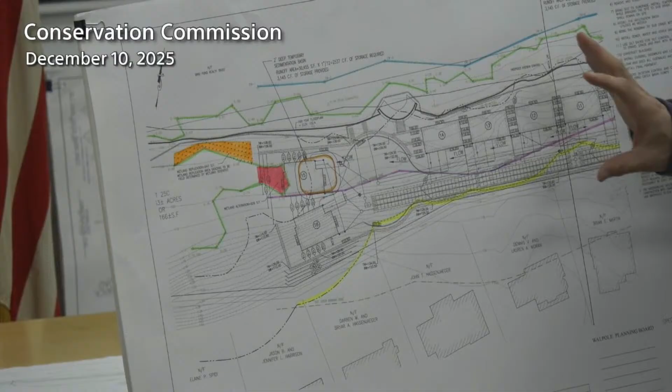This pink area was intended as filling of BBW, and the orange is the replication area. But after talking with this, we think we can shift some of these buildings around and end up with a different configuration at the end of the cul-de-sac, and then not affect any BBW filling.

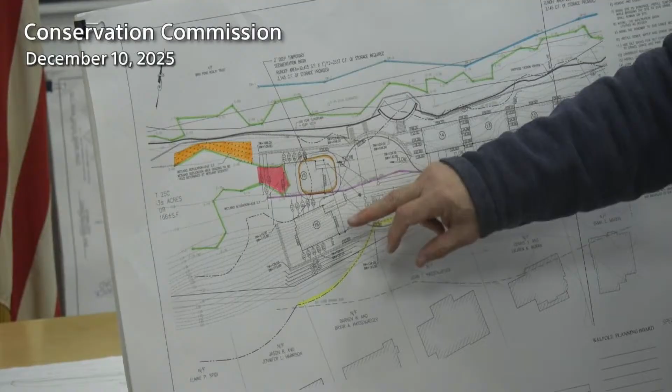So the only building that would change is building number 15. Well, the configuration or the orientation of that, one of those buildings would have to go. We don't know which one. My point is, if you're making other changes, we need to know what they are in order to address your request for a waiver. Well, absolutely, I agree.

Yeah, unfortunately there's a lot going on, holidays and things, people go on vacation, so we don't get it. But from the standpoint of the technical review meeting, we are taking those comments in, and we're trying to revise the plan to address the comments that have been raised.

Okay, so in that particular case, we would be doing something in that area to address that particular item, which is the BBW filling.

And then this dark line that you see across is the 100-year flood elevation. Now, I know you think that the level of Bird Pond is a temporary thing, but it really isn't, and I think you'll be hearing more from the dam people shortly.

Okay, that issue is settled right now until dam safety decides otherwise. It isn't affected by that anyway, it really doesn't affect what we're doing. We're not going in the pond, and we're not even close to being in the pond, so it's just the level that we flagged out, because it's the level of the resource area that was previously flagged by the preceding engineer.

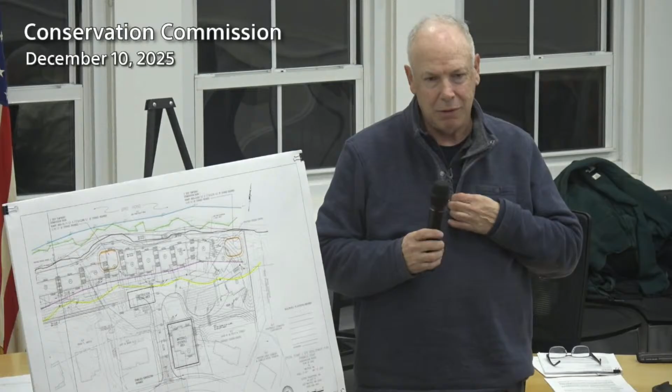Okay, all I'm saying is we're not disagreeing with you. We're saying that we're not interfering with the pond level, even if it were at its previous location.

Back to the 25-foot no-disturb line. Where is that, if you're gonna be moving buildings? The 25-foot disturb policy extends from the BVW, not from the pond elevation. I'm aware of that.

You said you're gonna make changes to the layout. Yeah, okay, you'll see that in the next revision, Pierre. Obviously, I don't think we can make a decision on your request for a waiver for the

25-foot no disturb until we see what your revisions are. Understood. I think the purpose of this meeting, because it's been a while since we had the peer review proposal, the peer review submittal, we haven't met since that time because there was only one meeting in November, only one meeting in December, so we're trying to catch the commission up to speed on what's transpired since.

Okay, so you're gonna be providing us with a revised plan, a revised set of plans for the next meeting. Prior to the, 2 weeks. And so that it can get reviewed, we need them well ahead of time, and also to get time for us to review and for Beals and Thomas to review. Understood, we're working on it.

Can I interject something? So, the original boundary of the pond is the P-series, which you've taken off the plan. Right, I understand, and you're asking us to put it back on. Yeah, okay, yeah, because that's where the riverfront area should be measured from.

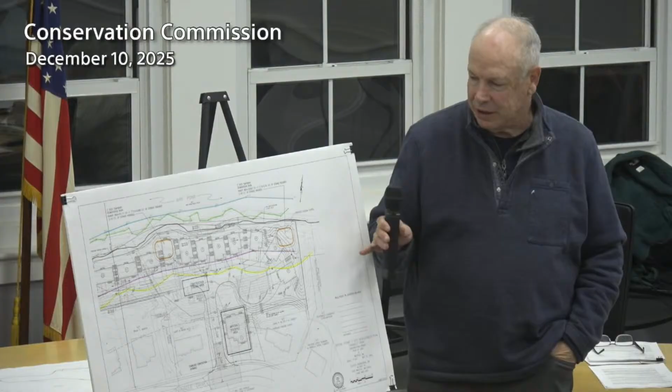Depending on if you have your BVW below the level of the pond, so the BVW is underwater. I don't think the BVW is below the pond level, even as it is today. The BVW is pretty close to whatever the line was before. It might vary a little bit, but it's not gonna affect where the elevation of the pond is versus the BVW line.

Yeah, I think that you need to put the P-series back on, because based on the... This is the first time we're hearing about it, though. Based on the ORAD and the SORAD, and then the final decision, they upheld that P-series is the boundary of the pond. The pond is the boundary of the river, so that needs to be put back on the plan.

Fine, we'll put that on there. In fact, we had it on the plan, and you asked us to take it off, so now we're putting it back on. He asked you to take it off. I think you replaced it with something else. I don't think anyone asked you to take it off.

Didn't John Glosser present those plans, give you those plans recently, the other day? With the— We have not, no, I haven't received anything new, no. He sent, I got a copy of the email that he sent you, you asked him for plans showing you— You didn't get those? No, I did not. Oh, I'm sorry, that's the problem with email.

That's why we really prefer final submitted plans should come in hard copy, because sometimes people submit plans and they're too large. If they're too large, yeah, nobody gets them, and nobody knows.

I'll drop those off, because I got a copy of it. It should be on your set. Agreed, but this set was submitted, and then you asked for those plans, and I was under the impression that he had submitted to you, because I got a copy of them. Okay, great, we're all on the same page right now, it seems like.

So let's move forward. So those are the things that we're gonna be doing. But obviously, I think there's other things happening with the Department of Recreation or whatever, that's gonna, by the time this transpires, I would think there's gonna be other things happening relative to the pond.

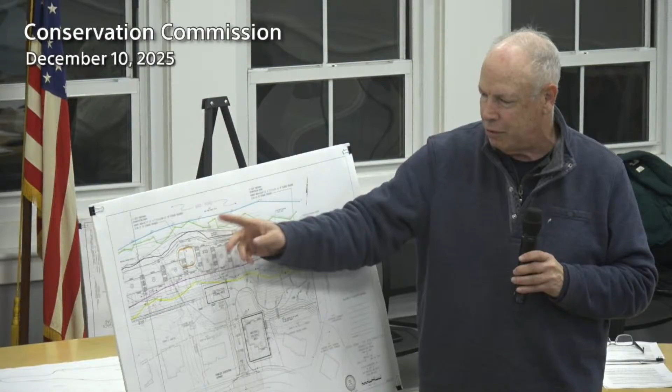The waiver takes us all the way from the beginning here, which is in the river—all of this area in here is all degraded, there's foundations and other things in here. So there's areas of this plan and this property that are significantly degraded, and it doesn't take a rocket scientist to see whether or not a waiver would be in order, because it's not in its natural state.

We'll address that. Okay, when you give us that, what else do we want to go over? Do you have anything else you want to present?

I would just suggest that if you want to revisit the 25-foot no-alteration area, that they mark out the specific areas at the site that they consider to be where they want a waiver. Right, well, we're looking at the whole site, 25 feet all the way straight down, everything.

Well, you're not proposing to alter the whole 25. No, but I think that the whole 25-foot area needs treatment, it's full of invasives. Well, a waiver means that there's no 25-foot no-alteration area. No, well, there's a big difference there.

Yeah, I agree. I'm thinking it would be something similar to what we did down on Burns Avenue, a restoration-type proposal within that 25-foot area, making it significantly better than what it is today. Then I suggest the commission, before giving any waiver to any of the 25-foot no-alteration area, that the applicant submit exactly the restoration that he's going to do.

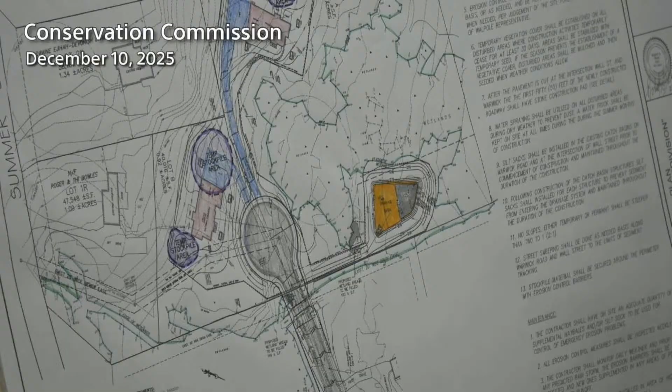It wasn't clearly understood at the time that the work was going to be allowed by the homeowner, but we have since reached an agreement. The agreement? Right here, but I'm not going to submit it - I can let you read it.

Well, we shouldn't be holding this public hearing unless you have an agreement from the property owner. There's an agreement here that says we have it. I don't think the chairman can - it's just not appropriate for it to be public record, that's all.

Is it signed? Yeah, of course it's signed. Doesn't it have to be public record if we're having a public hearing? Well, he could have given me a letter of authorization without disclosing the agreement, but we have the agreement. That's what we need.

This is an agreement, for the record, between Wall Street Development and Stephen Kelly and Gene Kelly. We need this for the file, so okay, then keep it - we need something on record that says this agreement exists.

Okay, sure, keep this. So for the record, there is an agreement signed by Gene Kelly and Stephen Kelly and Lou Petrosi from Wall Street Development, dated December 10th, 2025.

And I don't have to read the whole thing, but we'll just check and make sure it does what it says - that you're allowed to do what's needed. Essentially, if you look at the exhibit to that agreement, it has a shaded area showing where this grading line is, right here on his property.

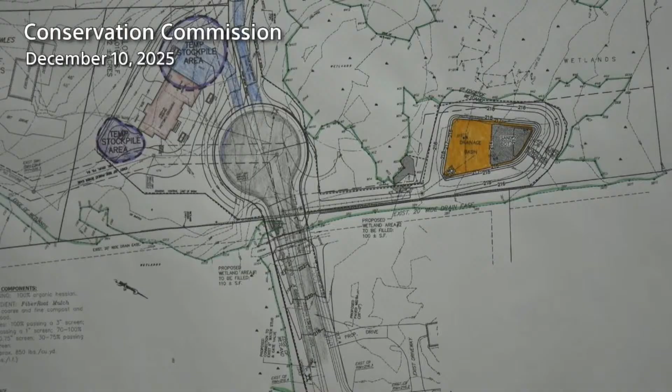So if you see the grade lines in this location right here - typically when you do grading, if you're covering up roots and things like that, the trees are going to die anyways. But at the time we were going through the subdivision process with the commission, we didn't have authorization to get that part included in the order of conditions. So now we're coming in for a modification with that agreement.

We've reached an agreement to do some tree removal and grading on his property, as you see in the attached Exhibit 1 to that agreement. By the way, there's not expected to be any excavation - we're just cutting the trees down to their roots, or down to the stump, even with the ground, and whatever grading happens will just be on top of the stumps and then seeded.

Okay, alright. Landis? So with any amendment to a plan, we need the plan that is amended and the work that is to be amended, so it's a little hard to tell with a marked up, reduced size plan.

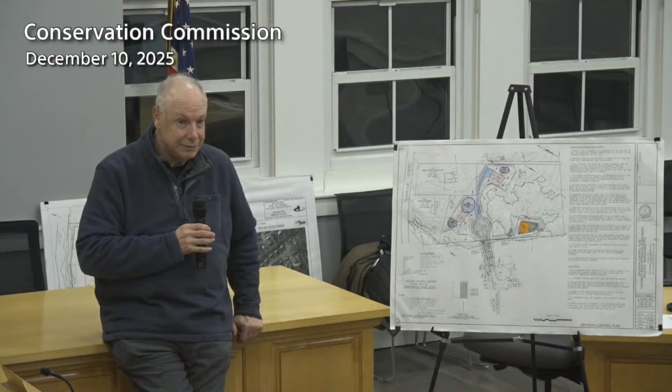We can approve this pending the revised plan? I'm okay with that. Does anybody have any questions? Jessica? Bailey? No. Al? No, that's it. Any questions or comments from the audience, please identify yourself for the record. Hearing none, we'll close the hearing. So moved, second, all in favor? Aye. We need a revised drawing, we'll hold off paperwork until we get it, okay?

I'll try and get that to you this week, by Monday, 2 copies please, full-size. Sarah, did you get that email?

Okay. Terrible. We just have one more. This is...

The other one. Well, it's all in here, I think, all the same.

Public hearing notice, Town of Walpole, Commonwealth of Massachusetts Conservation Commission, request to amend the order of conditions. In accordance with Massachusetts General Laws Chapter 131, Section 40, the Wetlands Protection Act, and the Walpole Wetlands Protection Bylaw, notice is hereby given that the intent of Wall Street Development requests to amend the order of conditions, DEP number 315-1324, proposed redelineation of wetland flags located at Lot A, Warwick Road Extension, Map 56, Lot 89 and 90. Application plans may be viewed at the Conservation Commission Office, Room 212, 135 School Street, or www.walpole-ma.gov/Conservation Commission. The public hearing in the above matter will be held in person at the Walpole Town Hall, FinCom Room, 135 School Street, December 10th, 2025, 7:09 PM. All persons are requested to be present.

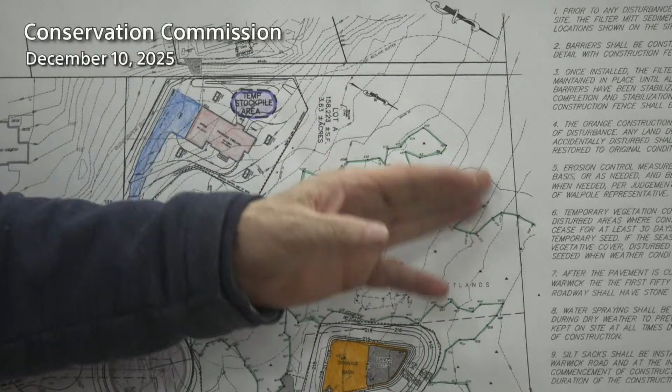So essentially, I don't know if you folks recall that when we did the ANRAD on this lot, this wetland line, there was a little bit of a disagreement, and we only got an ORAD for the delineation up to a certain point. I've asked Goddard Consulting to go back out there and revisit the line and go out there with Landis to get to an agreement of what the line is from, I guess, from this point back.

And basically come back and amend the line if there is a line change. This was the original line on the plan, but the commission only approved somewhere up here, right? I forget the flag number, but it was K1. Yeah, somewhere in here. So essentially, I'm asking to come back in and review this portion of the line going out, just so that there's no disagreement later on. And that's really kind of the request for an amendment.

I don't think we can resolve it today, because obviously Goddard and Landis have to go back out and agree on the final line. We need more information first, so she should do some transects of the area, additional data points. I'm just waiting for comments.

Oh, I thought I sent an email. You didn't get that email? I don't think so. A lot of sent emails to you. Going missing these days. Two emails, one I usually get your emails. One on the extension and one on this, saying I want additional data sheets. Is that the one sent last night? No, or the other night? No. Anyways, okay.

Yeah, additional data sheets, rather than spending two hours out there with her poking around, because it's a very complicated site, and I don't think this is the right time of year either. Because it's not right now, and it was three months ago when we started all this.

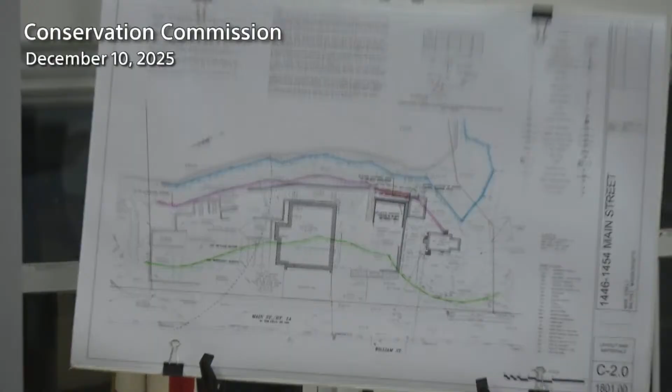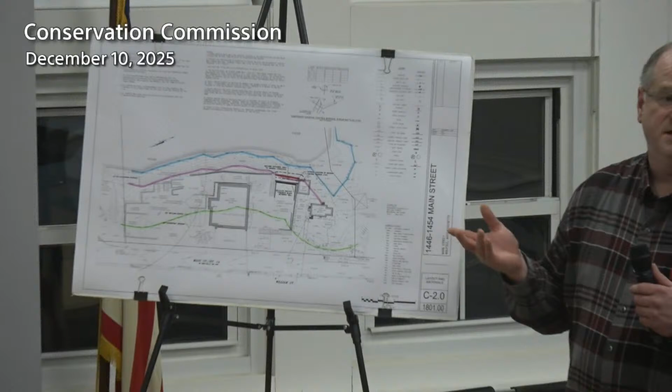I'm here with the applicant, Frank McNamara. This is his garage facility. Earlier in the year, he put up temporary concrete block walls and created storage bins for various landscape material, some of it from the town millings, mulch, and composting. Those were all established and put on top of his existing paved areas that was already present on the site. And after it was all in, at some point, somebody noticed he had done all this work. Somebody stopped by and said, you need to file a notice of intent. So here we are. We did an updated survey, flagged the wetlands, went through the site and looked at everything.

There's one area where he was within the 25-foot no alteration zone, shown right here in red. So the proposed work is to move that wall out of the no alteration zone, but keep the storage bins basically as is, other than sliding that one forward about 5 feet to get outside of the no alteration zone, which allows them to also get behind it to clean it up a little bit. That's the site in a nutshell.

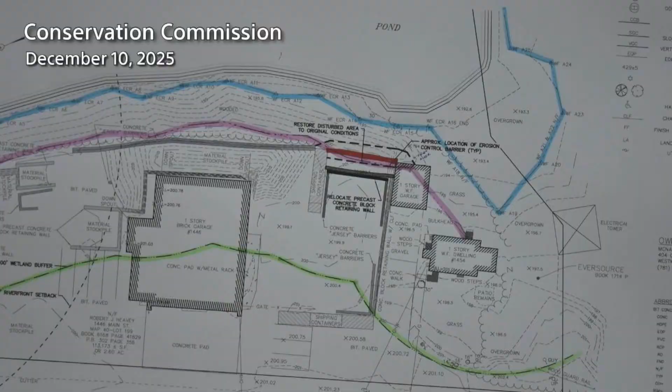You might have remembered the site partly. There was some truck washing occurring on this site, which I stopped, and then Mr. McNamara has now a tight tank inside the building, a facility inside the building to wash the vehicles, so that was cleaned up nicely, and there's no more washing of vehicles outside.

Also, in 2020, there was a notice of intent filed to demo the building and construct some condo units for storage, which we've seen before on South Street. That was never done, so this notice of intent came in to move the wall, and I did a site visit, and I think that's definitely a good idea.

The other thing I noticed is there's a big loam pile directly behind the building. Behind the building there's a concrete stacked wall, and loam being stored between the building and the wall. There is some material overtopping the wall, so I wasn't too crazy about that, because it's overtopping into the 25-foot no alteration area.